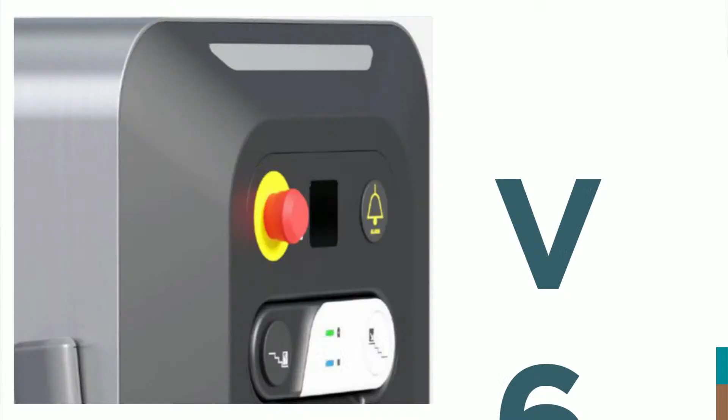Now we really think it was time to refresh the product, to further improve it, to come into the market and reinforce our leadership in this segment with a completely new product—more fresh, with higher performance, and with a completely new design.

Andrea, you have witnessed all the path, all the journey that Vimec has been doing with this kind of product, and you look pretty excited about what is going to happen soon.

Yes. The process has been interesting, it involved the whole company, and it was impressive the amount of people who put their passion into the project. I'm pretty excited about the new design, the innovation, the technical performance, so I look forward to start selling it. Yeah, I agree. Very good.

Our plan is to launch the product between the end of this year and the beginning of next. But when it comes to accessibility, the incline platform was not the only product where we've put effort—we've also worked to improve our current step lift program, and we'll have the opportunity to describe it better going forward.

This is basically what is going to happen pretty soon. On the other hand, we are also looking forward and wondering how the industry is changing and how we can grasp opportunities going forward, especially into the home lift market.

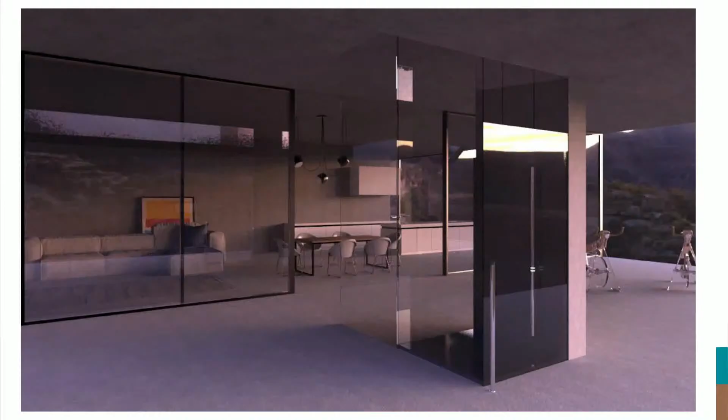So we started to elaborate concepts that will soon become real projects, which in our view will really change this industry with a product that will look completely different compared to what is available in the market today, like the picture I'm showing in the background.

But the product has not been the only thing where we've put effort this year. The other topic we'll discuss today is, let's say, under the umbrella of digitalization—many projects that will affect your business.

Of course, we firmly believe that digitalization and technology will never replace the relation between humans, between people. On the other hand, it can help people run a project more efficiently, it can improve the customer experience somehow, and it can basically increase capacity in some fields as well.

So in that perspective, we will run through our new portal, as Andrea mentioned earlier, and you will see all the potential that this kind of tool can give you by checking out all the documentation in your specific order, spare parts, finding the leads that you will receive in case, and so on. So that will be an important part which will help you make your business easier.

A second part that we will describe today is the BIM library, which is also part of our digitalization agenda and will be an important tool that you will have the opportunity to use with architects and consultancy firms and so forth.

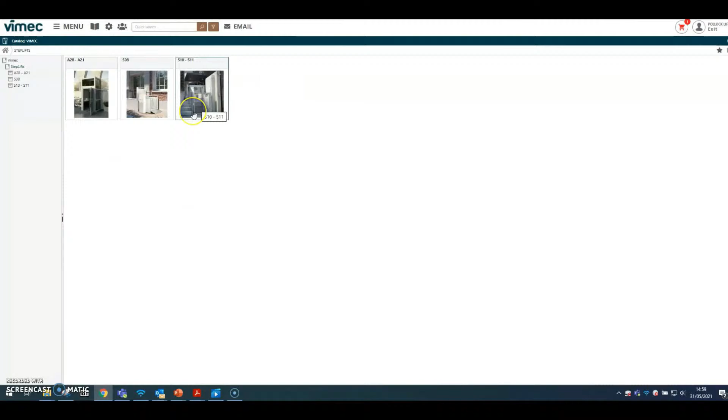Here, to deepen, we'll go into the vertical platform lift. Just to make an example, we have three different products. We'll go into the A28, from which on the page you can find all the documentation of marketing, spare parts, after sales, wiring, everything. There will also be a lateral menu that will be helpful for you, where you can get immediate information and pick all the details.

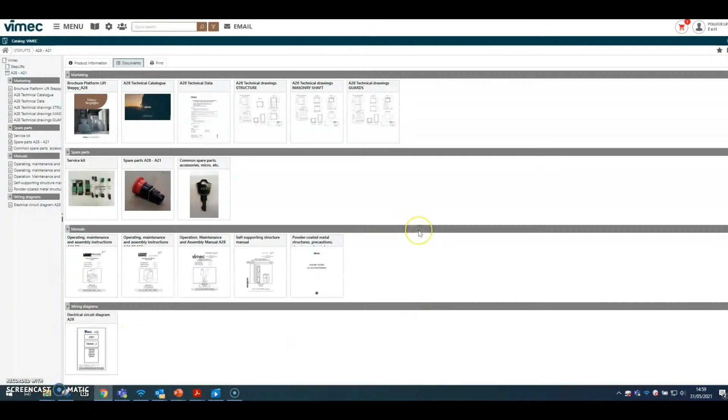You can deepen, and inside every page you will find all the specific documentation, as you can see here. To make an example, we'll go into the technical drawings of the A28. You see the full page, you can scroll it down to have all the information, you can download it onto your computer, or in case you can print it. Depends on what you would like to have, of course.

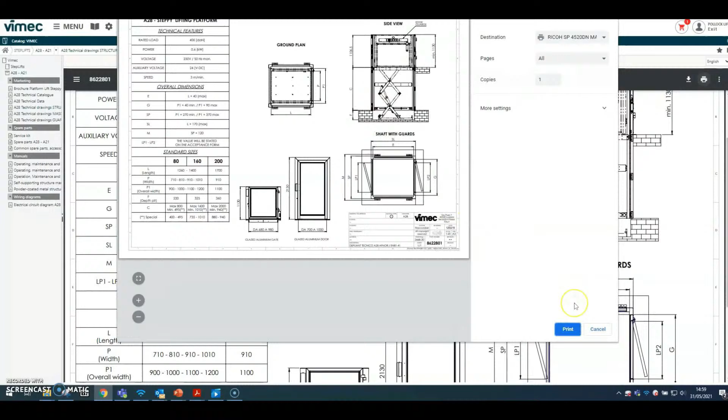Let me see how it works.

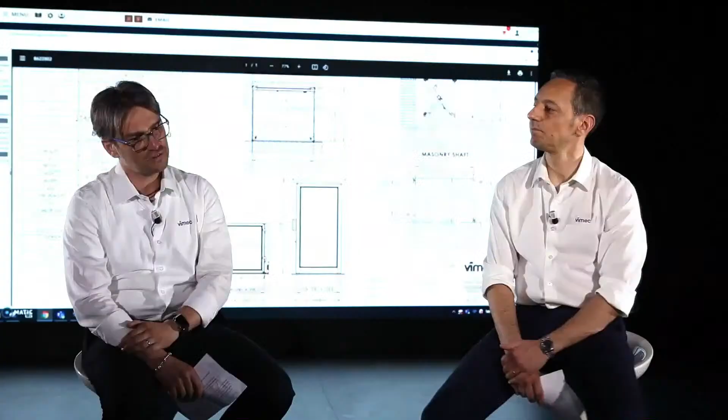Stepping back to the lateral menu, consider that you can get the same exact information in the same way, maybe in a quicker way if you want, but it's a list laid on the side.

Leads generation is important, so let's show how we feed our partners. Here comes the list, the information on the leads from the CRM. You can get into the list of leads that has been specifically sent to you. You'll find the list with all the details of every lead sent, company, name, city, telephone, all the information that we have the possibility to share with you to improve your work. It's one of the most important features.

You can also make the research from the top of the page, searching by city, for example, or by name, so you can use different keys. We'll make an example here of one specific case, just to show you how it works. Press research, and you'll see that one has been identified specifically.

Back to the general page, just to show you a very important point of this tool, the status. The status will help you focus on the productivity of the leads itself, to see how it works, how it has developed. You can change it by going inside the lead, with the various options available for you, that we can see here.

You can save it and it will remain in the main page.

Having said that, you can also step in directly from the main page and generate a specific proposal dedicated to this particular dealer, and register it directly into the configurator. This tool is very important, I guess, to allow you to follow in detail how you developed and how productive this service is to you.

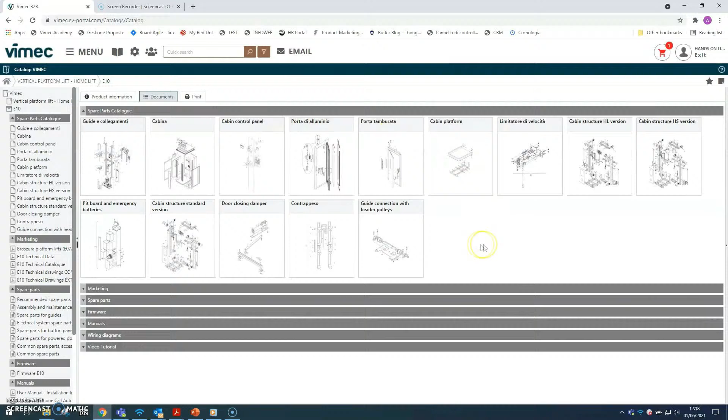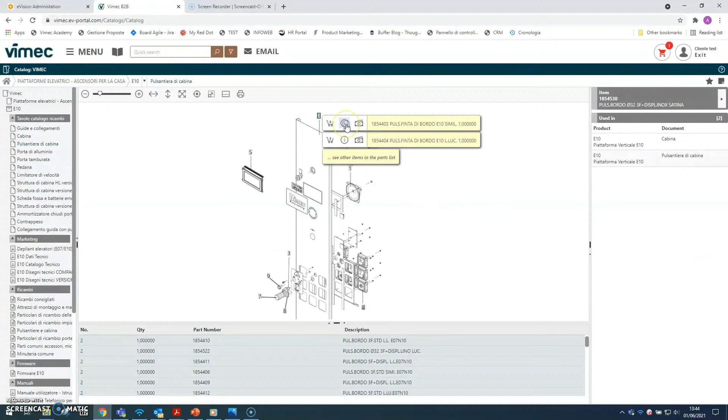We can see on the preview the price and the availability in our warehouse. It can be added to the basket if it is the part you need to purchase. You can rename your own basket in order to recognize it quickly, and then it can be processed.

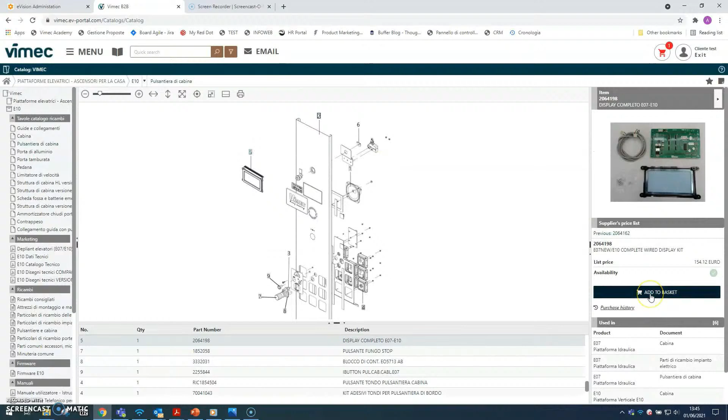We need to select on the order page which kind of order it is - standard - then we can flag the part in order to add it to the purchase order form. On this screen, we will get immediately the invoice address on the left-hand side.

On the right-hand side, if the delivery is different from the billing address, then we can type all the address in there. Clicking next, the software will also highlight any information that has been forgotten, so you can correct your mistake. We will get the detail of the order, and clicking again on Send Order, the order is sent.

to Vimec System Management. You can also look for a spare part starting from the serial number, right, Claudio? Yes, of course. The system has been developed to track the specific part number.

On the search bar, typing the model and full serial number, we can find the specific lift in the system, and opening all the documents in the system will show you that specific order and document - spare parts, everything related to that lift.

Looking at the electrical part that has been selected with that serial number, we will display to the dealer exactly the part delivered and shipped with the lift.

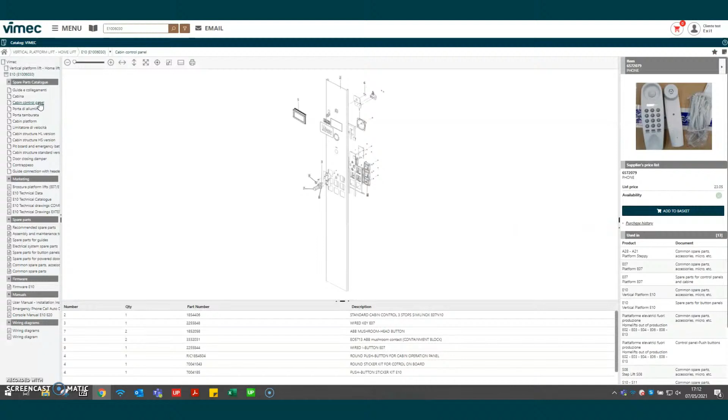It will be the same for the spare part, with the interactive drawing helping our partner find exactly the part they need, and then they can add it to the basket like before.

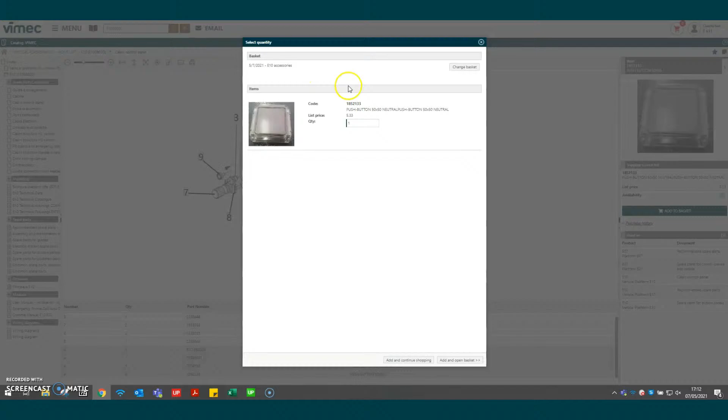Again, retyping the reference of the order, just for a quick search for the dealer. They can select again and go on with the purchase process.

Last but not least, you can also generate your own EC certificate by adding the test report, right? Yes, on the Vimec portal we have access to the CRM, where we have a specific section dedicated to the test report, where the dealer can directly from their office generate and add the test

report, just typing model and serial number. This section will display immediately all the checklists that the engineer normally has to carry out to certify that the installation has been done accordingly and is safe to use.

And simply by adding the name and surname of the engineer, signature, and name and surname of the end user, all the documents will be stored in our system automatically.

Also, in the same section, it is possible to add a picture or the scanned part of the document.

Once the form has already been signed, if there is some missing information, the software will always highlight what is missing so that everything is filled correctly, and then it can be sent through the web to

our system. The web portal, at the end, when everything has been uploaded to our server, also gives the possibility to resend the signed test report on the web to some email, which could be the email of

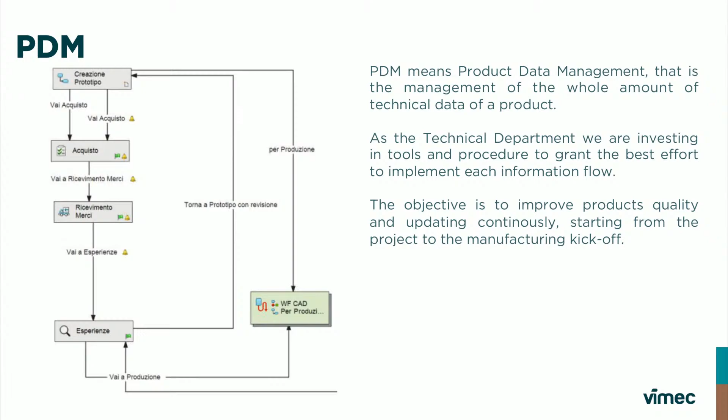PDM means Product Data Management, a system able to manage the whole amount of technical data of a product during its life cycle. By the PDM, we are able to create, archive, modify, and manage the technical file of a product. At the end of last year, we introduced this system in Vimec for three main purposes.

The first is to be able to manage complex projects, meaning projects in which many people work at the same time on the same tasks. The second purpose is to be more efficient in managing all the workflow typical of a project, for example creating a prototype, buying it, and testing it.

And the third purpose is to spend less time creating and modifying our technical files, and so to improve our product quality.

My second topic is the technical configurator. This is a very important system for Vimec because, together with the commercial configurator, it creates all the bill of material for production and all the operative design for every order sold by Vimec.

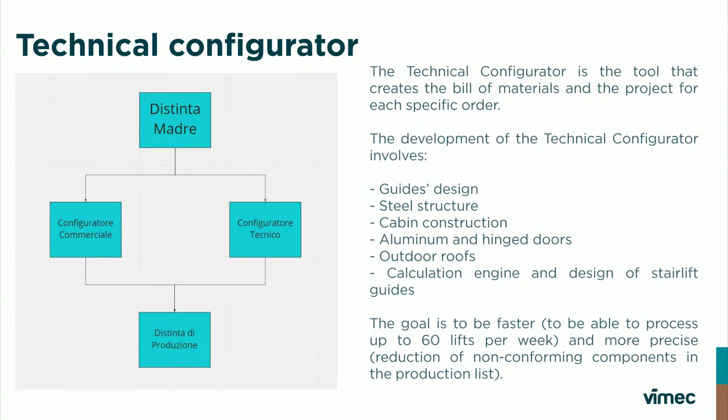The technical configurator involves a lot of aspects of our machine. For example, for the elevator: the steel structure, the cabin, the doors, the roof. And for the stair lift: the engine that is able to design the rails.

At the beginning of this year, we started a project to improve our technical configurator with two important objectives. The first is to be faster. For example, for the elevator, our goal is to be able to process up to 60 elevators in a week.

The second objective is to be more precise. More precise means reducing the non-conformity, the non-conformal components inside the production list.

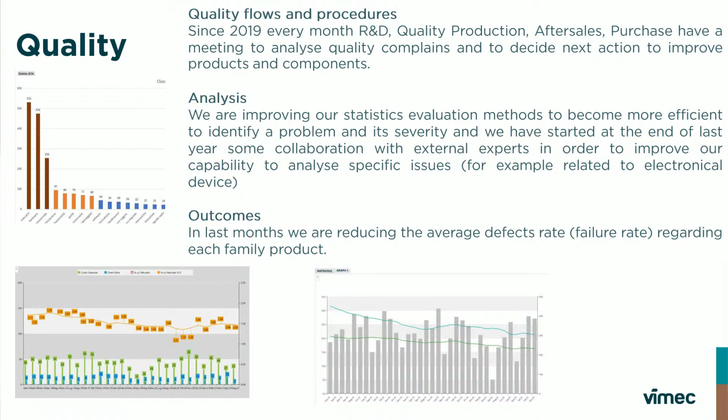My third and last topic is about quality. As you know, from the beginning of 2019, every function in Vimec involved in quality improvement meets every month to analyze the last complaints and decide what the next actions are to improve our product.

In addition, since the beginning of this year, we are improving our statistical evaluation method to become more efficient in identifying a problem and its importance. We are also starting collaboration with some external specialists to be more efficient in analyzing specific issues and finding solutions.

As an outcome, in the last months we are reducing our average defect rate, the failure rate, and also our warranty cost. We are confident to be on the right path.

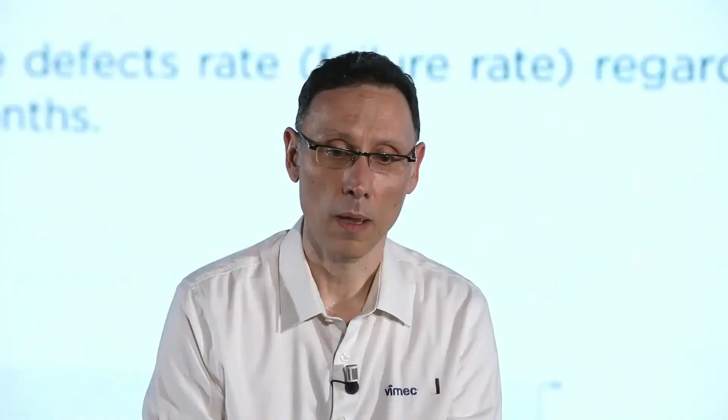In addition, at the beginning of this year, we improved two aspects of our analysis capability. The first is improving our statistical capability, to be more efficient in identifying a problem and its gravity. The second is starting collaboration with external consultants to be more efficient in identifying problems and finding solutions.

As an outcome, in the last months we are reducing the average defect rate, the failure rate, and also the cost of warranty. So we are confident to be on the right path.

About quality issues in production this year, we focused on kit missing parts. We started, developed, and installed a pick-to-light system. This system guides the operator with information through flashing tags about the part to pick for the composition of the kit.

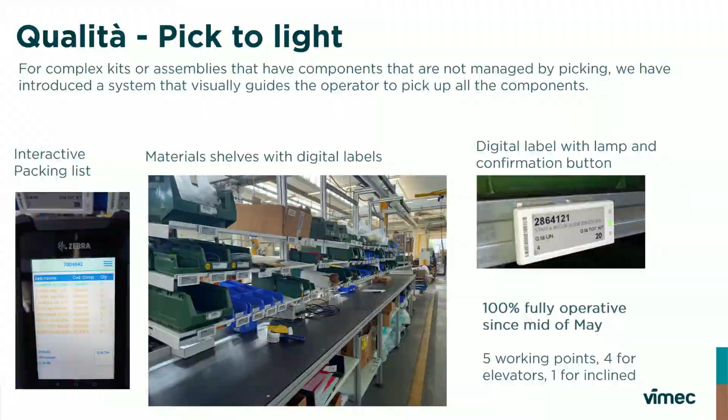Each time the operator takes a part, they have to release a feedback to the system through a button confirmation located on the electronic tag.

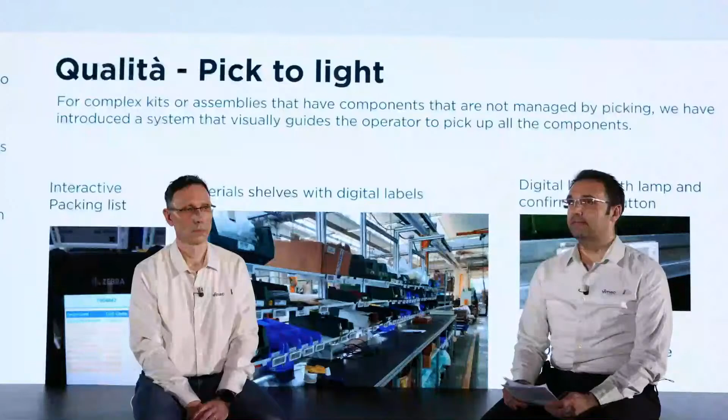At the moment, we activated in the middle of May 5 stations working with this system: 4 in the elevator area and 1 in another part of the assembly lines.

Internally, we are reinforcing the logistics and procurement service through 3 main projects: the reliability of the stock, the MRP and reorganization, and the supplier Kanban. About the reliability of the stock, we are moving in 2 main ways.

The first is the introduction of rotary inventory about our stock. The second is the check of the quantity at the incoming department.

The second project, MRP and reorganization, started in 2020 with new software for the procurement of production parts. The software is able to manage standard parts and special parts.

Last project, the supplier Kanban, is a system of material delivery that we agreed with the supplier, giving us the safety and reliability of having parts in-house for 1 month.

If we talk about lead time, we have to consider what happened last year. After the stop in spring 2020, the logistic chain started expanding very quickly. This is evident looking at the Logistic Manager Index, a KPI that measures the expansion level of global logistics. In Vimec, this effect was quite irrelevant at the beginning of the year, but now, during last week, especially by end of May, we are experiencing some issues with our sub-suppliers, and we are extending some lead times for delivery on certain product configurations.

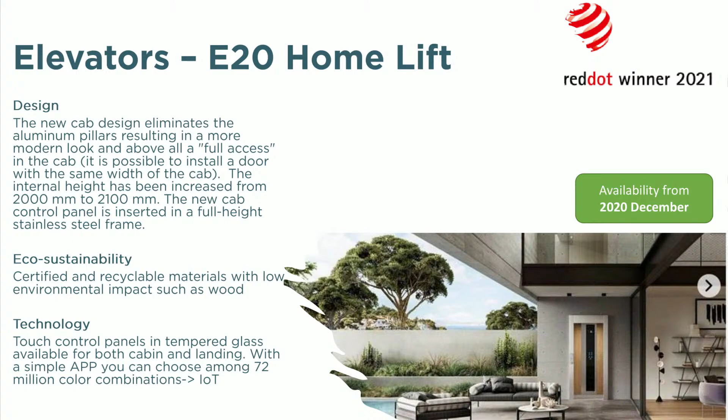I would like to start from the E20 home lift. As you already know, it received 2 awards, the Red Dot and the Archiproducts, shown inside the cabin, together with the main features of the E20: eco-sustainability, technology, and design. We have the possibility to combine 72 million different colors and tones for the cabin lighting. We use fully recycled wood for the cabin walls, and we can exploit a new feature that allows us to have the same size for the doors and the access to the cabin.

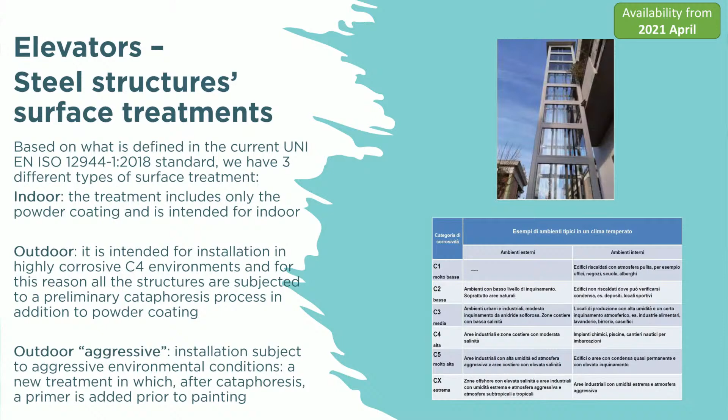We have important news about the steel structure surface treatment of the elevator. Based on the ISO 12944 standard, we now have 3 different types of surface treatment. The first is based on powder coating, only for indoor installation. The second is based on a cataphoresis process plus powder coating, suitable for outdoor installation up to C4 corrosive environment degree. The third, the new one, is based on a cataphoresis process with an added primer plus powder coating, suitable for aggressive environments up to C5 degree.

Starting from February, we are manufacturing the E07 and E10, Eco Vimec and Easy Move, with 2 distinctive push-button panel controls. For 2-stop elevators, you have 2 buttons, 0 and 1, and for 3-stop elevators, you find 3 dedicated buttons.

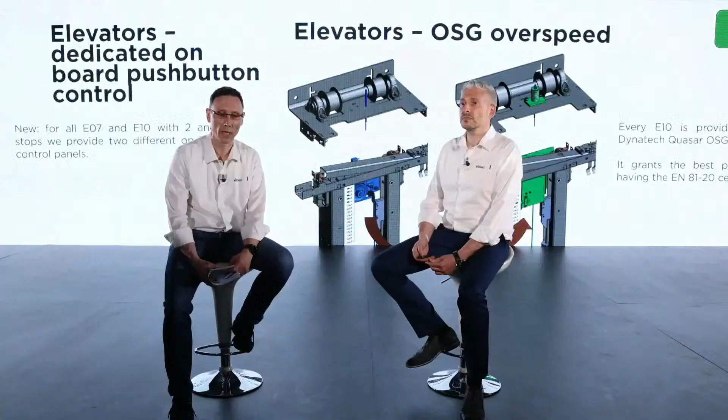Starting from June, every E10 is provided with the Dynatech Quasar overspeed governor. It offers better performance than the previous version, for example less noise, and it is also EN 81-20 certified.

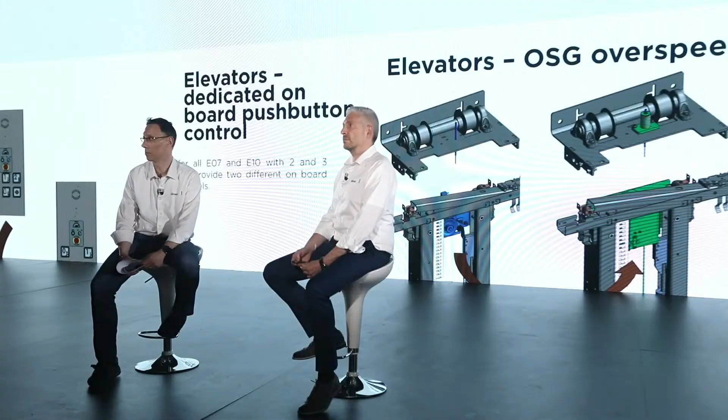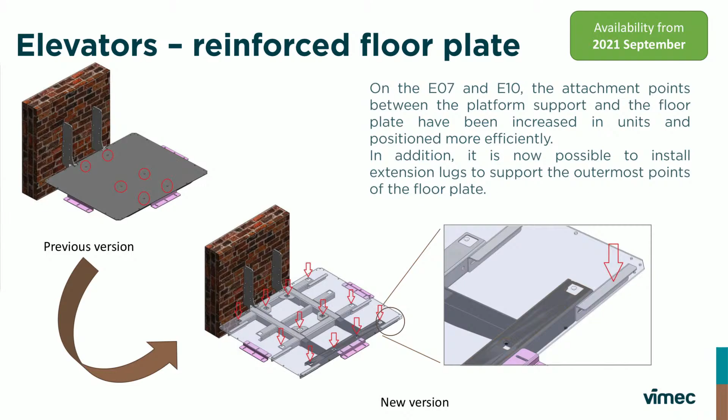Starting from September, on the E07 and E10, the attachment points between the platform support and the floor plate have been increased, basically doubled, and these units are also better positioned. In addition, it's now possible to install an extension lug to support the outermost point of the floor plate.

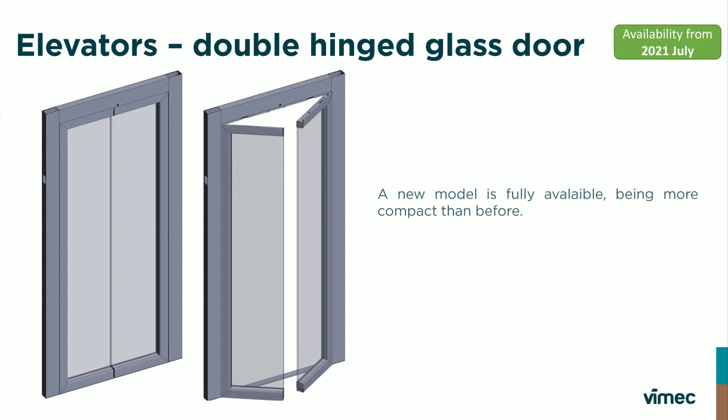Starting next month, a new model of double-hinged door will be available. The interesting point is that we achieve the same size for the doors and the access to the cabin. We can also grant a finishing level for this premium segment solution through the full RAL color range.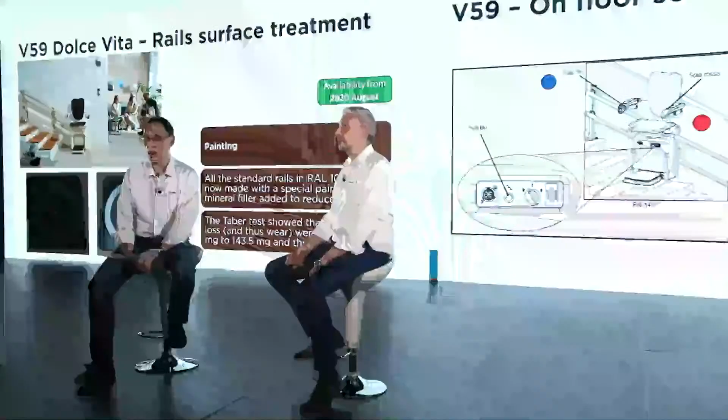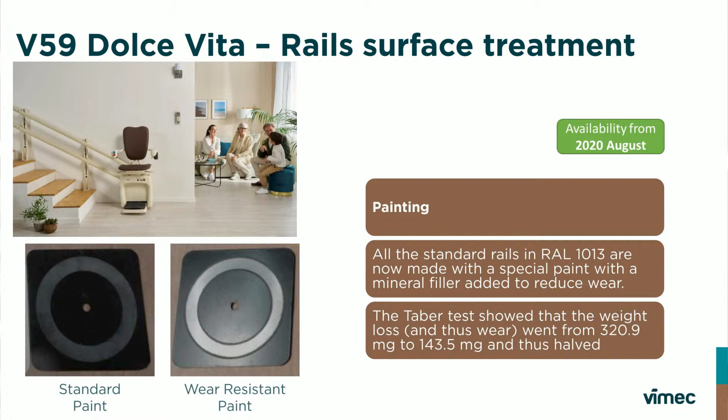Now some improvements about our chairlift V59 Dolce Vita. The first improvement is about painting. Starting from August last year, all our standard rails in RAL 1013 are now made with a special paint. This special paint contains a mineral filler able to reduce wear. We did tests with a grindstone, called the Taber test, which showed that weight loss is about 50% less than the previous version, so we are confident this reduces wear.

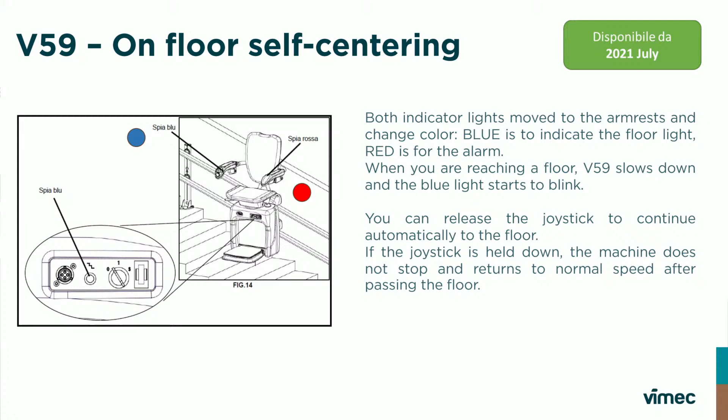Starting from July, the V59 chairlift will be provided with 2 new indicator lights on the armrest, moved from the seat to the armrest. On the right side you'll find a blue indicator for on-floor self-centering, and on the left armrest a red light indicator. On-floor self-centering allows the user to reach the intermediate stop or floor without difficulty, in a very intuitive way, simply by releasing the joystick when reaching the floor.

Starting from September, the new S11, which we call S11 Plus, will be available and ready to order. It represents an update of the current S11. I can show you some features: first, an inverter will always be installed, granting soft start and stop. You will have LED lighting on board, and the electric descent for safety operation will always be available as standard.

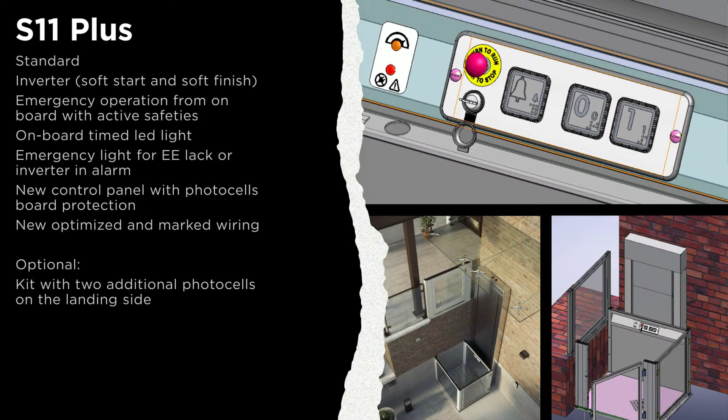For sure, you can have a wiring system that has been improved, and you will always have the possibility to install in a wall shaft or in a free environment, without having the possibility, as today, to install it inside a steel structure. Regarding the inclined platforms, we would like to share a couple of slides.

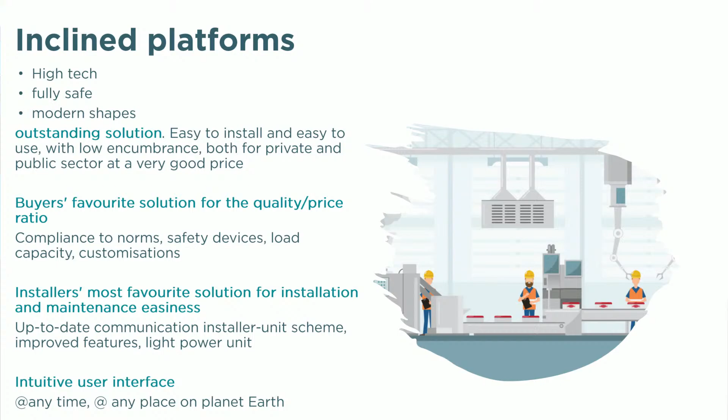It has been hard work doing together with all the people inside Vimec and all the stakeholders by involving a lot of installers and dealers.

What we are planning to present is an outstanding solution that will be characterized by high technology, fully safe, and modern shapes. We are planning to realize a solution that will be the most favorite from the buyers, because we are going to present a quality/price ratio that will be very good.

Also, we think about the installers that will find this kind of solution lighter and easier to install related to the current V64 and V65.

Also, the user interface will be simplified in order to grant the same level of usage from South America to China and in any place of the world.

And now some anticipation about the most important feature of this new machine. It will have a downwards bar in rest position. We reduce footprint when the appliance is closed, and also footprint in straight and curved section. And we also reduce the weight of the machine.

Please take in consideration that the current machine is made by iron, while the new machine will be made mostly in aluminium. We will have only one version for each slope and staircase side.

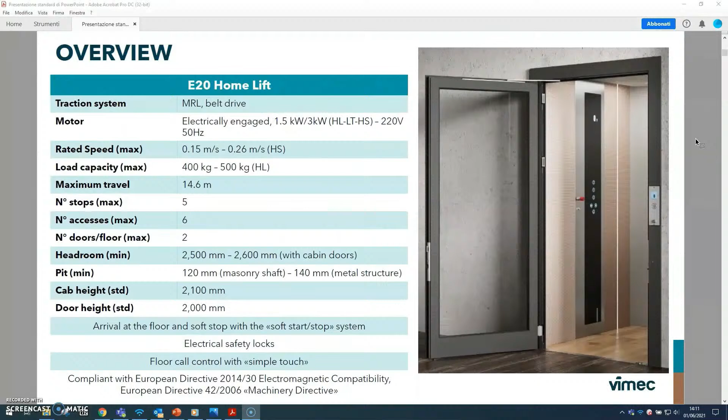So let's see the first example. You can see on the screen our E20 Home Lift, the newly born in Vimec. So each technical catalog starts off with a series of introductory pages, as you can see on the screen, with some technical data, some news about the product.

And then we come to what you will see on the screen. You see some pictures, some icons, and some colors that you will find throughout the document to underline the unique selling points of each product, regarding different topics, of course.

So let's see some examples. The first example is sales memo. Sales memo indicates all these topics that are very relevant for salespeople. So as you can see, you find a list of links that are clickable. And here we have an example: with one click, you can see all the available combinations inside the cabin for E20.

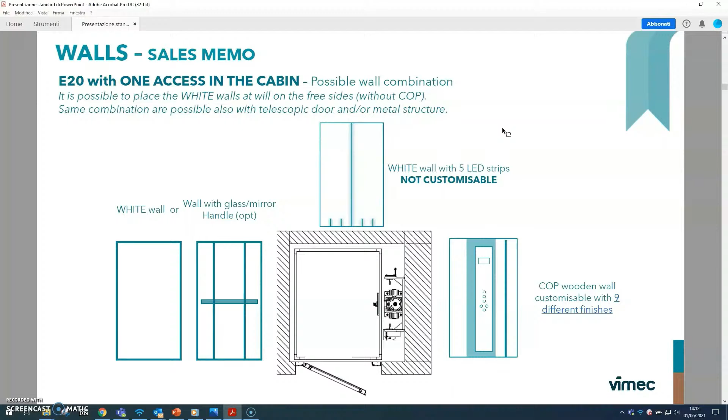And from this slide, you can find other links, for example, the 9 different moods available for E20. And so you can easily see all the moods together in one slide. Let's see another example here: we have standard versus optional equipment of E20.

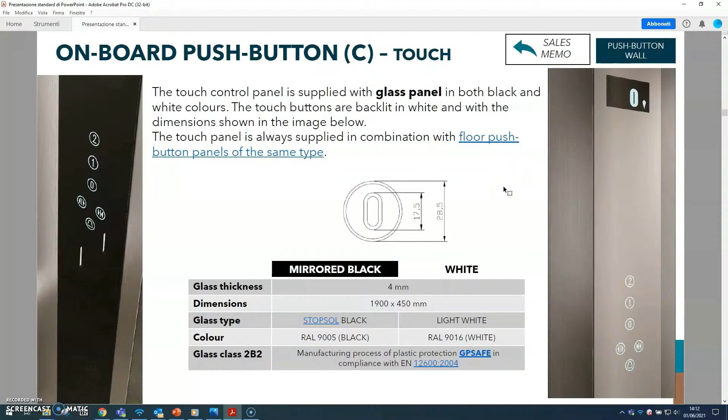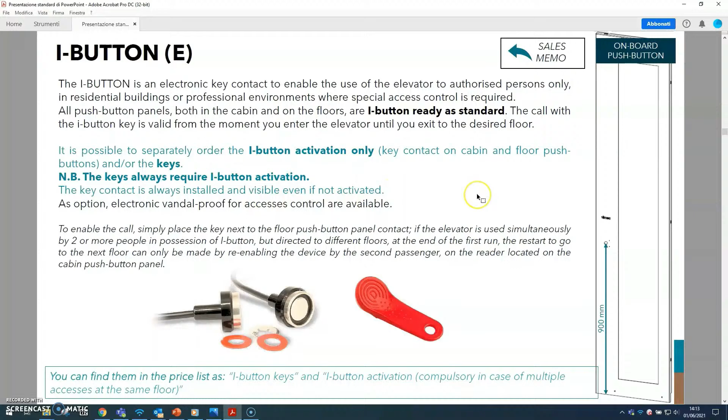Each item of the chart is a link. By clicking on one of the items, you have direct access to the onboard push button, for example, a detailed slide. From this detailed slide, you can navigate by clicking on the links to different slides regarding the same topic, for example floor push button or the I button, as in this example. By clicking on the bookmark icon, you can go back to the previous menu.

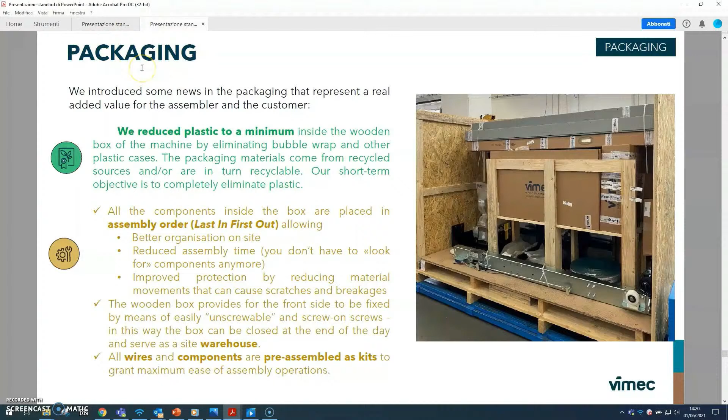Let's see another example. Here we have E20 Eco Vimec. The same list that we saw before for the sales memo is also available regarding different topics. Here, for example, we have some unique selling points about assembly and maintenance. This in particular is a page regarding the packaging. By clicking on the icon, you can go back to the previous menu.

The same logic is followed, for example, in case of the unique selling points regarding the safety devices included in E20. This is the overspeed governor detailed slide, where you can find some pictures and some notes about how it works.

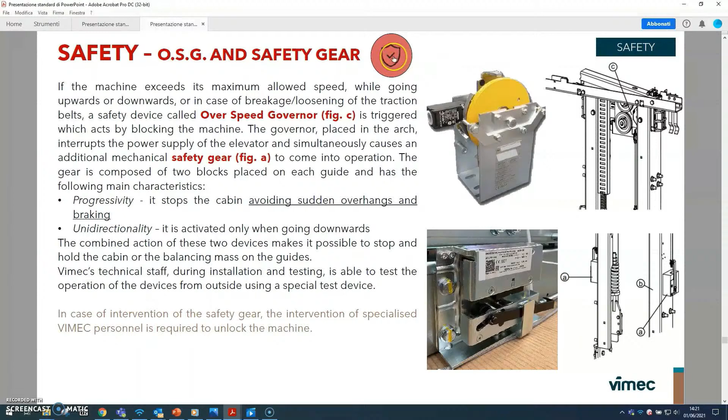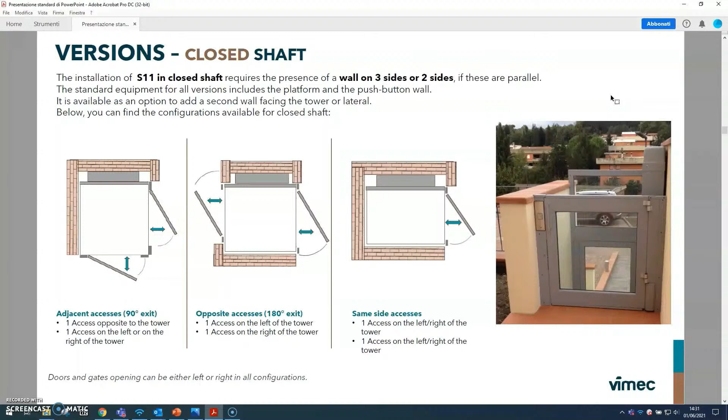Now let's move to the last example, S11. Inside the technical catalog, there are different kinds of slides. You can also navigate through the technical catalogs in a more traditional way. As you can see, there is a table of contents which lists all the topics inside the technical catalog. Here we are browsing, for example, through the versions of S11, so closed and open shaft.

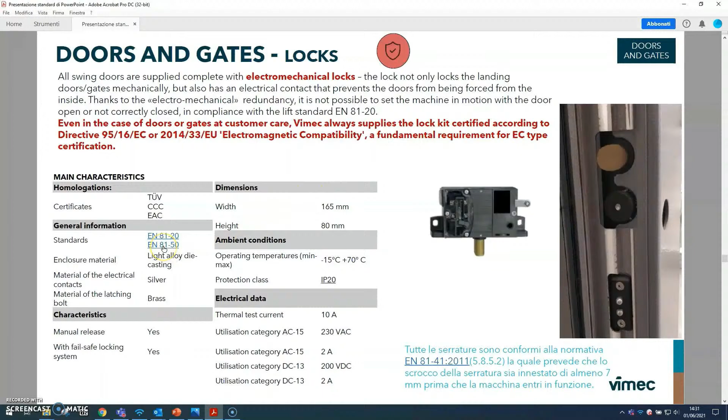One last thing about the technical catalogs: each technical catalog has a part regarding an appendix that lists the technical terms and the technical norms contained in the technical catalogs. As you can see, throughout the document, by clicking on the technical term, you can access the appendix to know something more about it.

So the technical catalogs will be available in the new partner portal. As you can see here, by clicking on a family of products and on a particular product, in the marketing documentation you can find the technical catalog. By clicking on it, you can directly read it inside the portal, or you can either download it or print it if you prefer.

The technical catalogs that are already available are the ones regarding all our vertical platform lifts and step lifts. The technical catalogs for the remaining products will be issued in the next months. One more thing I would like to add is that this documentation is continuously improved and updated. Since this is a tool created for you, for all our partners, we will gladly accept recommendations or advice on things to be added or improved in the technical catalog.

Thank you, Alice. As you have already underlined, any feedback is really precious for us. There's always room for improvement. We will be glad to receive your feedback and suggestions in order to continuously improve this kind of tool.